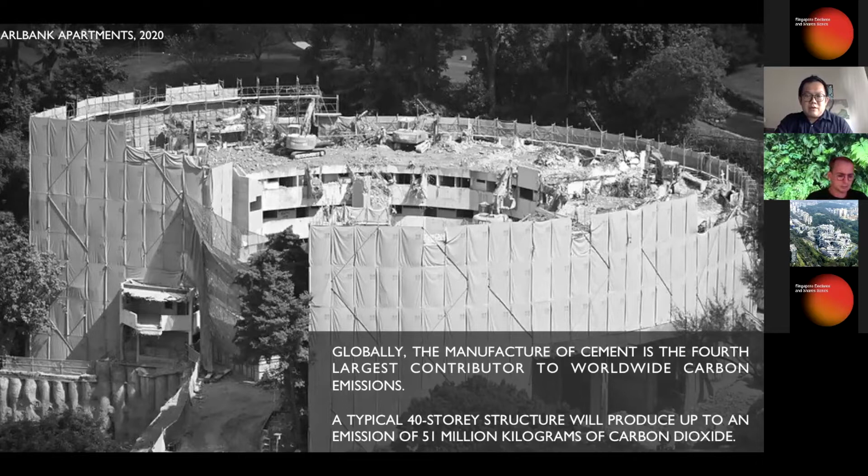Our esteemed moderator today, Dr. Rezai, in a paper found that a typical 40-story structure built today, or built in our city today, will typically produce an emission of up to 51 million kilograms of carbon dioxide. Translating this number into trees, it is equivalent to carbon dioxide emission sequestered by 8.75 million trees. So that's basically saying that tearing down a large structure like this is equivalent to deforestation of 8.75 million trees.

In a recent study released by the World Green Building Council, it was stated that in the total carbon emission over the lifespan of a building, up to 30% is embodied and unaccounted for during calculation of energy efficiency. So in all the green retrofits we see today, much of the carbon reduction only rests on the operational aspects, and not the embodied aspects.

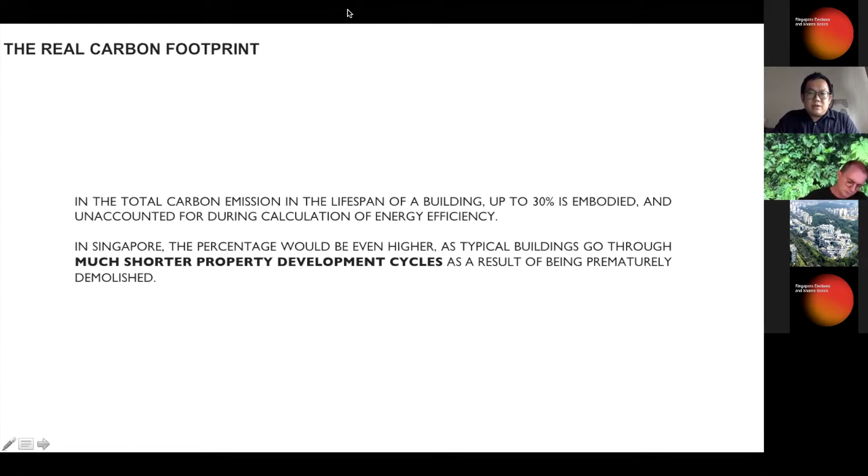And the chair of the World Green Building Council further says that in Singapore, this percentage of embodied carbon would be even higher, because typical buildings go through much shorter property development cycles as a result of being prematurely demolished.

But it would also significantly reduce carbon footprint. Now, Singapore is a very high density and compact, highly urbanized city, and it is not difficult to imagine the multiplying effect of this kind of effort.

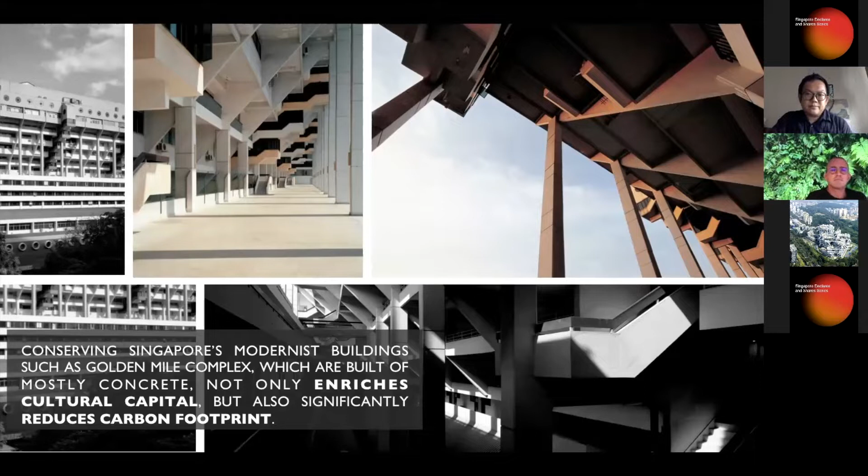Next I'd like to discuss some examples of green retrofit in Singapore, recently completed about 2 years ago. In recent years, such green retrofits are increasingly favored, and it is actually called the Enhancement Initiative. A number of key tenants prioritizing environmental sustainability favor renting in properties that are well rehabilitated rather than built anew.

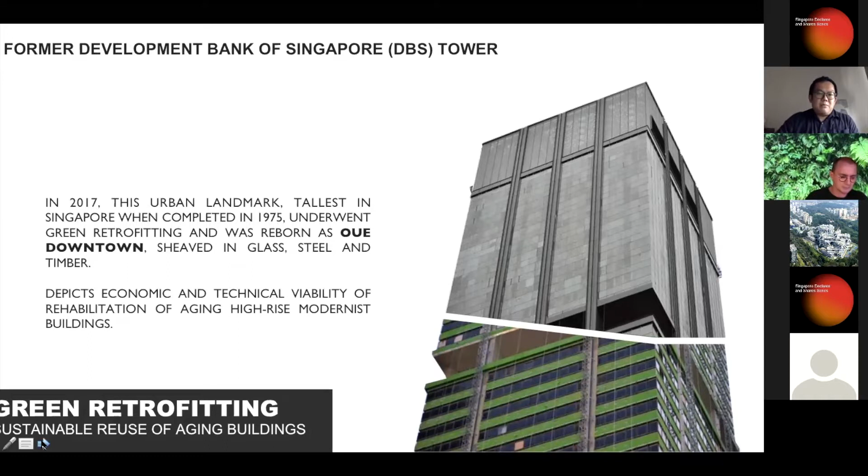This is the example. It's the former Development Bank of Singapore, DBS Tower. It was the tallest in Singapore when built in 1975, and was reborn as OUE Downtown. This actually shows that there is economic and technical viability of rehabilitating aging high-rise modernist buildings.

However, current BCA, Building and Construction Authority, green mark systems, although they encourage retrofitting, mainly encourage upgrading of M&E equipment and energy efficiency performance. It does not count retained embodied carbon as energy saved. So this is something that can be relooked at, to give recognition to sustainable practices of building professionals and also building owners.

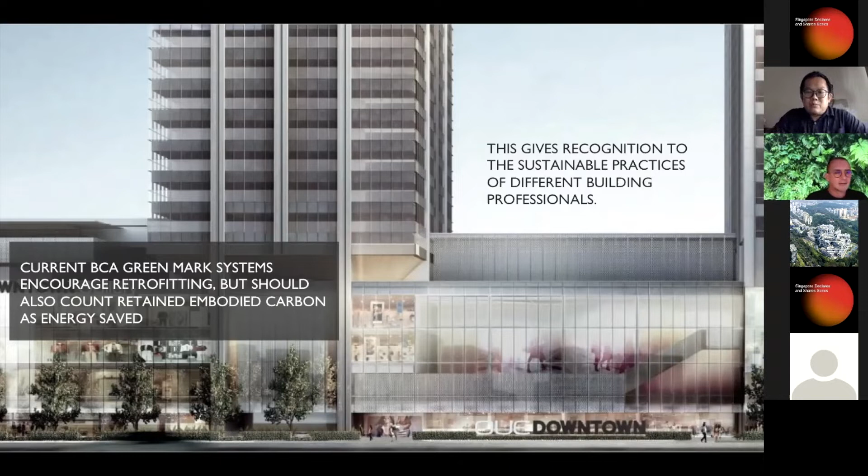Now, of course, the OUE Downtown was a retrofit without consideration for conservation, because nobody can recognize it as the same landmark after its retrofit. For buildings which have exceptional significance or conservation status, such as the Golden Mile Complex, definitely more creative design would be needed to reconfigure them without compromising the inherent attributes. For example, in this case, there is a colonnaded sky deck, there are the inclined terraces, as well as the iconic step profile of the buildings.

There are some obstacles, however, towards retention and rehabilitation of modernist high-rise complexes. One key one is code compliance, because these buildings were built in the past and conform to past codes. Something that can and should be done quickly is to have the regulating agencies allow for more performance-based evaluation exemptions, right?

Such as specially developed building codes for green retrofit projects in the UK and Germany. Why is this important? Because we want to preserve the heritage and original features within the design of the buildings, for example, in Golden Mile Complex.

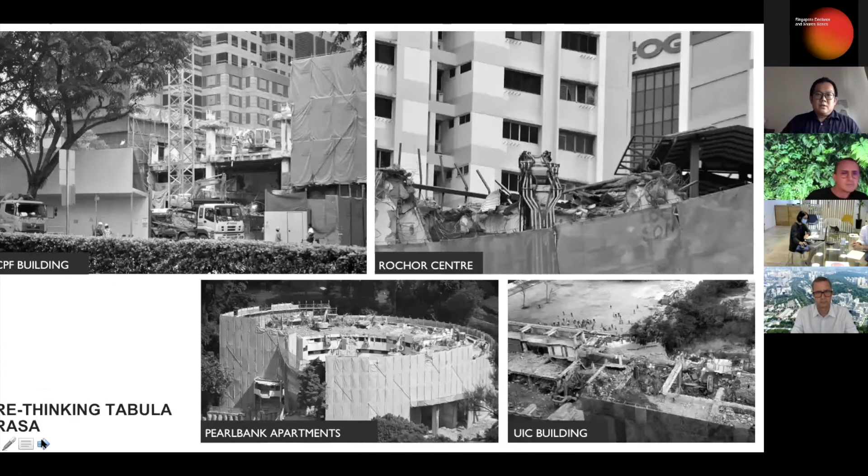Okay, I will come to the concluding part of my sharing. In the recent past, I would say 3 to 5 years, we have seen increasing scale and extent of destruction of high-rise and large modern buildings. Not all of them are worth preserving, you would say, but certainly we have to rethink the tabula rasa, or blank slate approach to development, especially in a high-rise, high-density, and urbanized environment like Singapore.

On the top left, you can see the CPF building, which was torn down just as the neighboring DBS tower was retrofitted. In the center photo, Rochor Center, arguably one of the largest public housing complexes, was torn down to make way for the North-South Corridor underground expressway, along with Pearl Bank Apartments and the UIC building. Over time, Singapore's reliance on tearing down and building up buildings without really increasing much density or height has to be rethought.

And of course, there have been movements, local, regional and global, such as Singapore Architects Declare, RetroFirst in the UK, and also the Climate Heritage Network, that try to tie the lofty aim of preserving cultural capital together with gaining environmental capital for future generations.

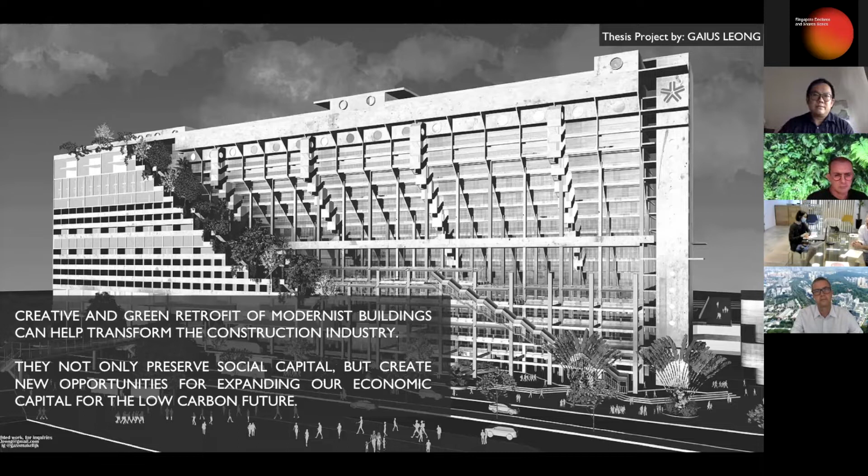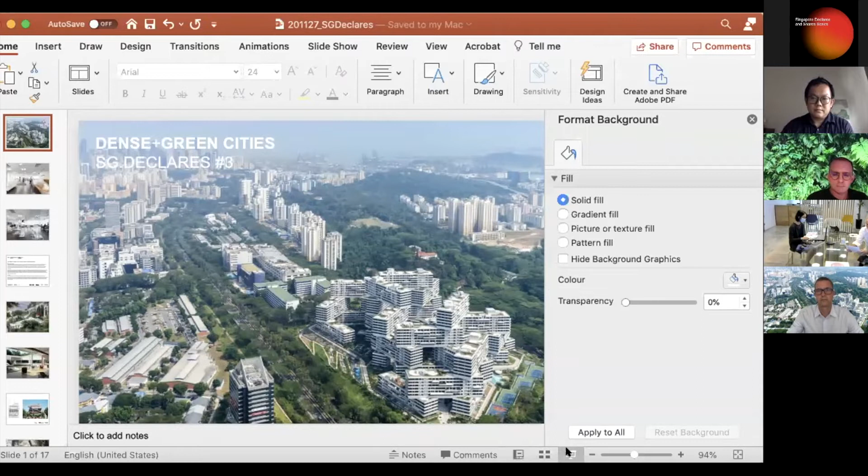Thank you, Weng Hin, thank you for that beautiful presentation, and thank you for reminding us that for every battle that is lost, there are some which are won, and that the movement is definitely worth supporting. Thank you also for reminding us of URA's initiative to retain the Golden Mile complex, which is a milestone in their development work in Singapore and retention of historic buildings.

I move on to our second speaker. Dr. Thomas Schroepfer is full professor and founding associate head of the Architecture and Sustainable Design pillar at the Singapore University of Technology and Design. He directs the university's award-winning Advanced Architecture Laboratory. He has published extensively on his work, which has been exhibited at important international venues, including the Venice Architecture Biennale. Thomas is also a dear friend who has accepted to share his thoughts with us, particularly on the latest book he's published on dense and green cities.

Thomas, we see the screen, and we see the beautiful mixture of green and built environment, natural environment. And this image, do please take over. Your 8 to 10 minutes start now. Thank you, Hossein, for your introduction and for having me.

I'm very happy to be able to contribute to the SG Declares webinar series, and of course I fully support its important cause. Like many architects, I believe that our cities need to be dense if we are to address the many challenges of the current climate crisis. I also believe that high urban density is a fundamental principle for sustainable and vibrant cities.

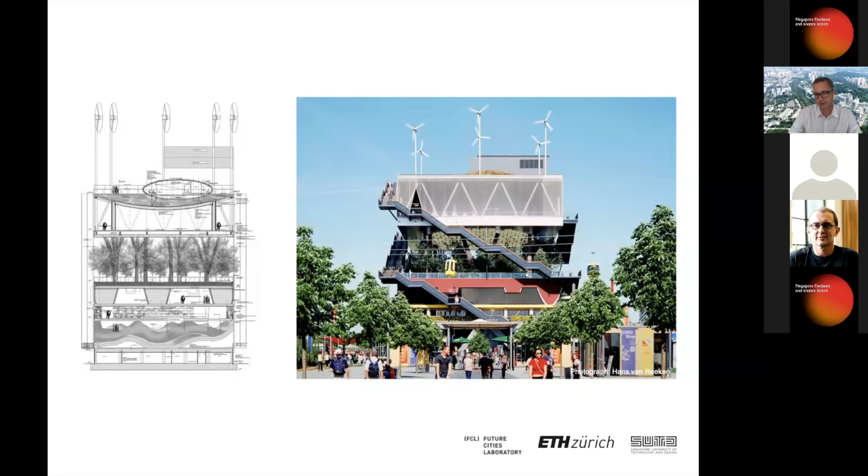Again, we fast forward to the year 2000. This is MVRDV's Dutch Pavilion in Hanover, Germany, in which the Dutch architects really rethought what density and built structure in the future should be. You see here a very interesting layering of productive landscapes, as well as enclosed spaces topped with windmills and fields on the rooftop. This picture is not taken on the ground floor, it's in fact taken somewhere in the middle of this Dutch pavilion.

So it shows you, in a built statement, the idea of a complete integration of nature and architecture. Of course, in Singapore, over the last couple of years, we have seen a fair share of projects that explore what we refer to as the dense and green paradigm. I'm sharing one here with you, which is Group 8 Asia's Punggol Waterway Terraces 1 from 2015, where again you see a very nice integration of larger urban ecosystems. In this case, a linear blue and green space, and then the replication of green spaces on multiple levels, in this case in a public housing project.

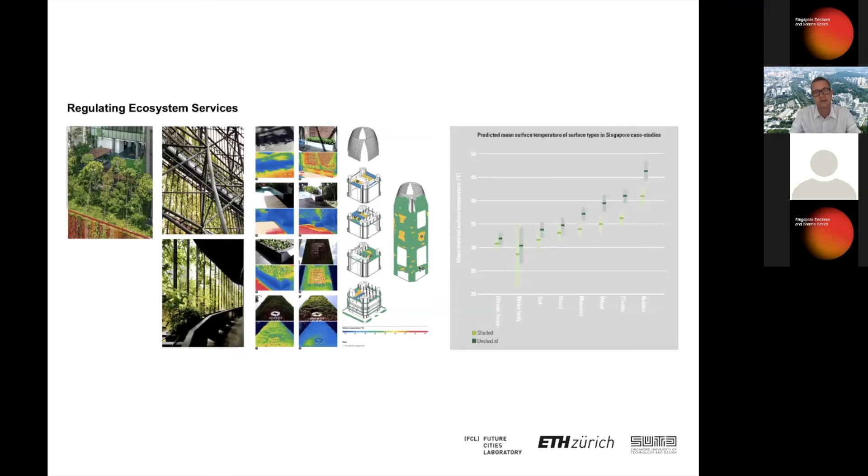So for our research, we are actually looking at the various dimensions that such buildings can offer to provide a more sustainable urban environment. The first one being regulating ecosystem services. This refers to the effect of dense and green buildings upon the urban microclimate, their contributions to mitigating urban heat islands and stormwater management. The project that you see here is of course WOHA's Oasia Hotel Downtown that was completed in 2016, that we did an extensive case study on.

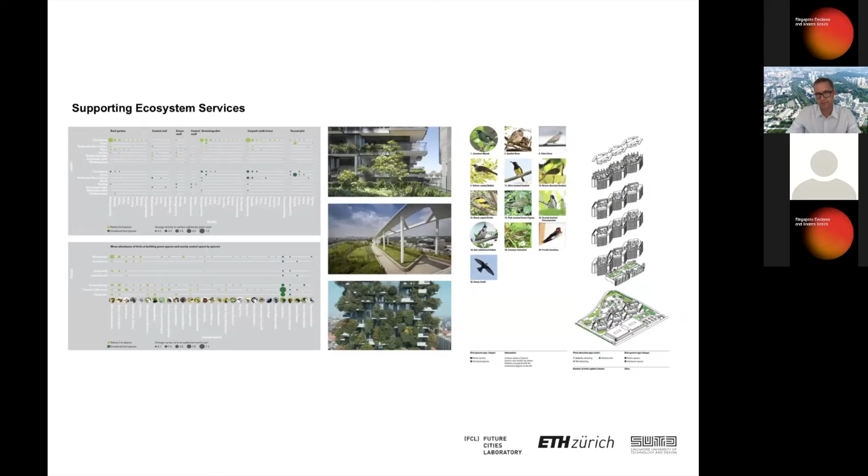The second dimension that we're very interested in with our research is supporting ecosystem services. This refers to services that are underlying all the other services and contribute to the overall resilience of urban systems. Key supporting services of dense and green buildings include their support of higher levels of biodiversity. The project you see on the right is again a WOHA project, SkyVille at Dawson, completed in 2015, a project we also did an extensive case study on. Next are socio-cultural ecosystem services, which refer to the contribution of dense and green buildings to human psychological well-being and culture. The project you see here is the aforementioned Punggol Waterway Terraces 1, which we have also analyzed in depth.

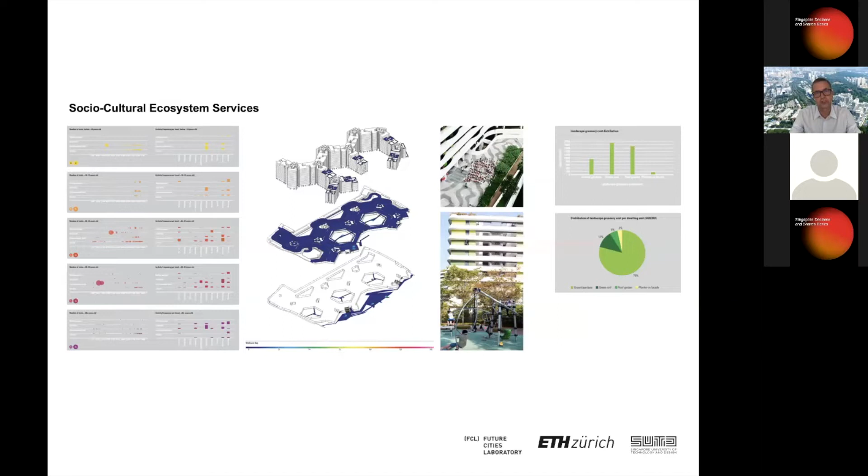Last but not least, a dimension that is very interesting for us as well is the economic ecosystem services. So what does all of this cost and is there a return on investment? This generally refers to the contribution of dense and green buildings to land value appreciation.

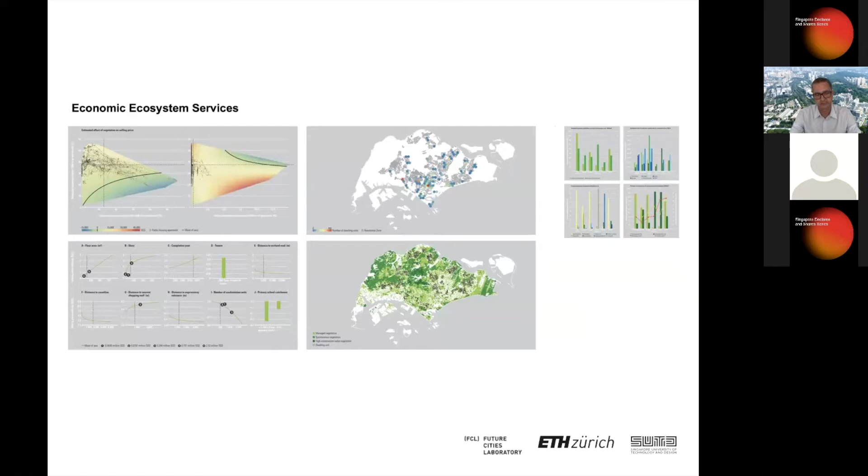In terms of our research findings, of course in a short presentation like this, I can only give you a very brief overview. First, it is important to note that dense and green buildings provide important regulating ecosystem services such as mitigating urban heat island effects. They can offset solar radiation interception. For example, greenery implemented in our research case studies led to a decrease of surface temperatures of up to 23.5 degrees Celsius.

The second point is dense and green buildings provide important supporting ecosystem services, such as the significant increase of urban biodiversity and resilience.

The third point is dense and green buildings provide important socio-cultural ecosystem services, such as fostering social and cultural integration. They contribute to human psychological well-being and increase the amenity value and attractiveness of urban landscapes significantly. By providing places where people can meet, rest, and play, they foster social and cultural integration.

Last but not least, dense and green buildings are affordable in terms of construction and maintenance costs. In our research, we found that construction and maintenance costs of dense and green buildings were variable, but generally quite affordable. They contributed between 1.5 and 4.5% to the overall cost.

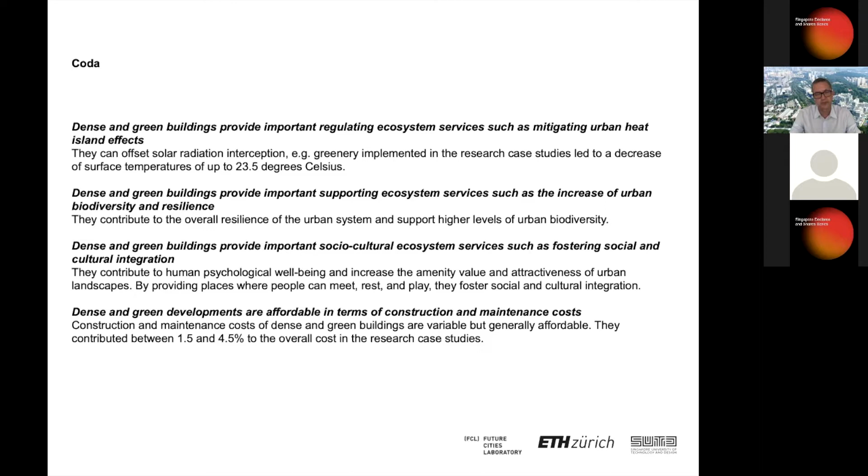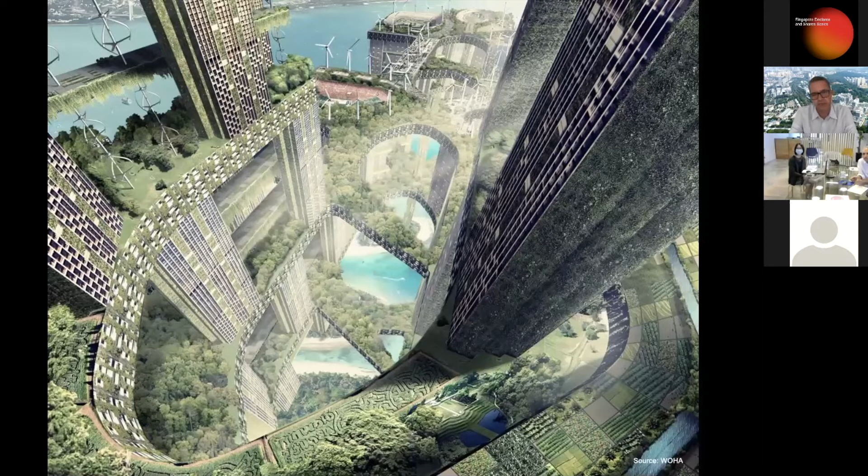So I want to close with a rendering by WOHA. I would like to state that for me, architecture is about optimism and possibility. Facing the current climate crisis and pandemic, as designers we must propose strategies for more sustainable and resilient, as well as healthier future urban environments. The dense and green city I was referring to today is one such proposition. Thank you.